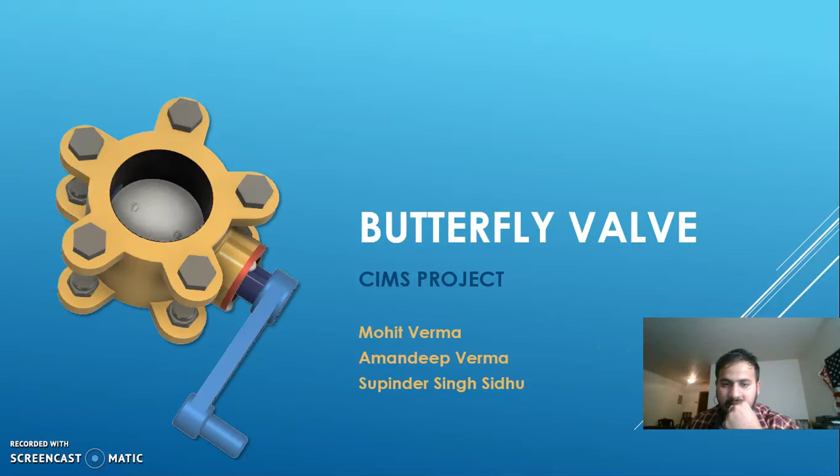Hello friends, I am Mohit Verma and my project is Butterfly Valve. I have three members in my group, Amandeep Verma and Supinder Singh Sidhu with me. So our project is on Butterfly Valve.

So Butterfly Valve is a quarter-turn valve in which we have a revolving disc inside the housing. When the disc is parallel to the flow of the water, it allows the fluid to flow. But when it is perpendicular to the flow of the water, it blocks the flow of the water.

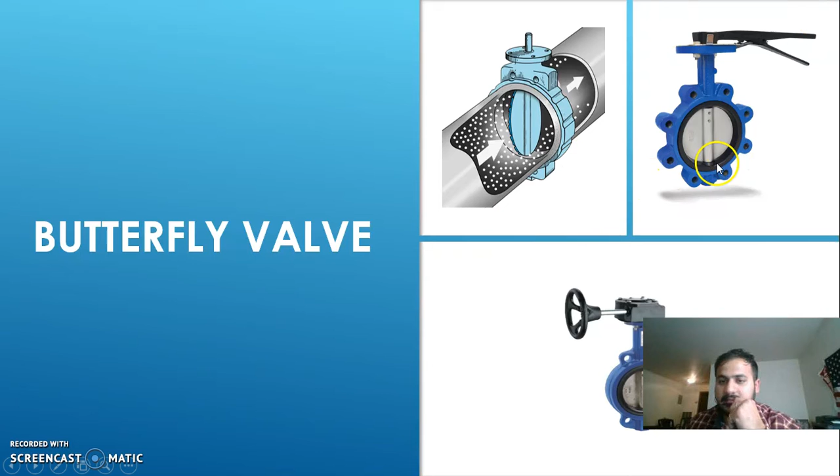So here is our design, which we have designed in Fusion 360. We have a main outer shell, and then we have a valve disc, which is inside the shell, and then we have the shaft, the handle, the rivets, and the nut and the bolts.

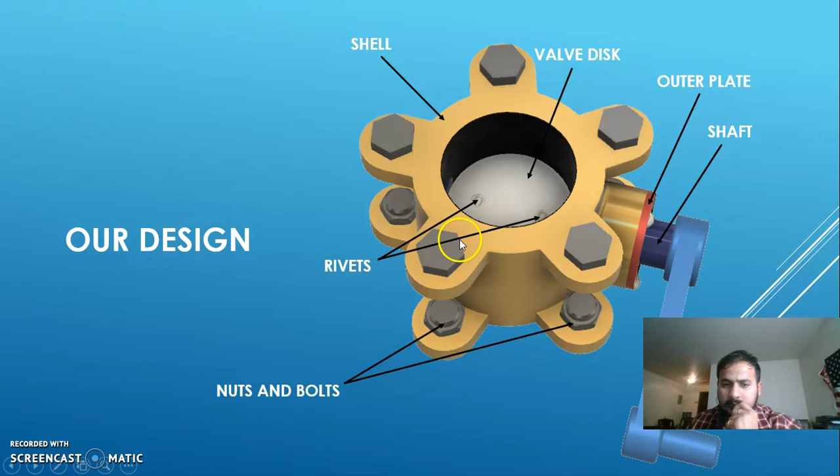So here is an exploded view of our model. The disc goes from the upside and the shaft goes from the right. We have an outer plate which is used to stop the shaft inside the shell.

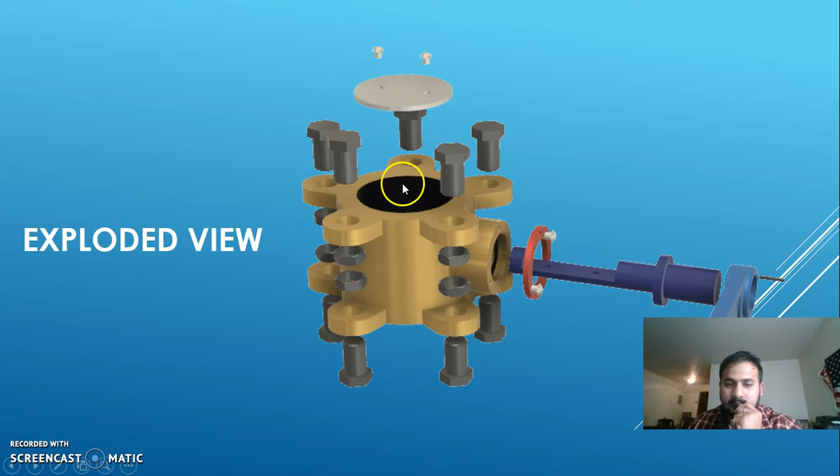We have the nut and the bolts which are used to connect the valve with the pipe assembly, and then we have a handle which we have designed to attach to the shaft using simple keys. We have also designed the gaskets, or we can say seals, so it will not allow leakage.

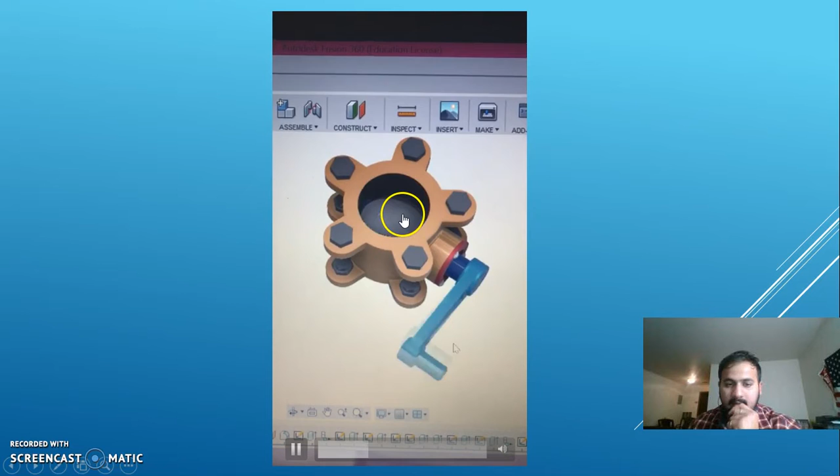So here is a video of how our valve works. So when it is parallel, it allows the flow. When it is perpendicular, it blocks the flow.

So we applied some DFM techniques on our project. Earlier the disc design was like this. It has a hollow hole in the center which has threading inside it, and the shaft also has threading, and it is inserted in this hole.

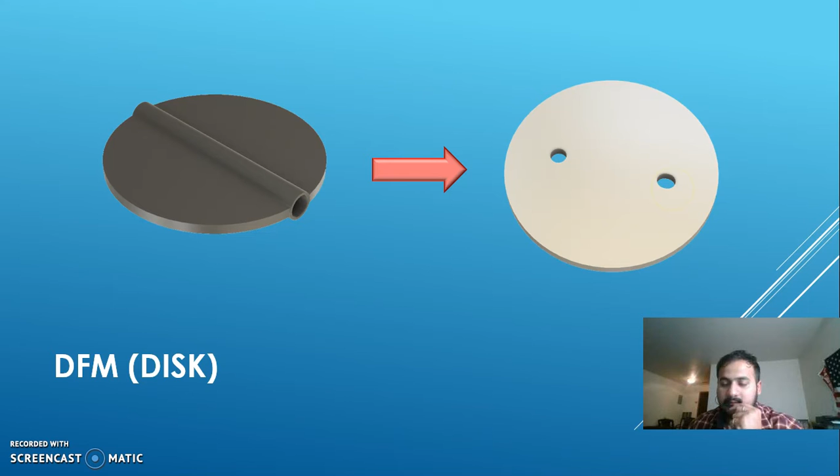But the disc we designed is a circular plate with two holes. The first hole is smaller, you can see, and the second hole is a little bit like a slot and a little bit bigger. We give it a little bit of tolerance so that we can easily align the holes with the shaft holes.

So we applied the DFM technique on the shaft also. Earlier the shaft was like this. It has threading. The threading process is a time consuming process, and it also uses some gears to revolve it. But our shaft is simple. We can machine it using simple turning operations, and this slot can be easily made using a planer.

And we have a key slot over here, so it can be assembled with the handle. We have two holes over here so that the valve disc can be riveted over here.

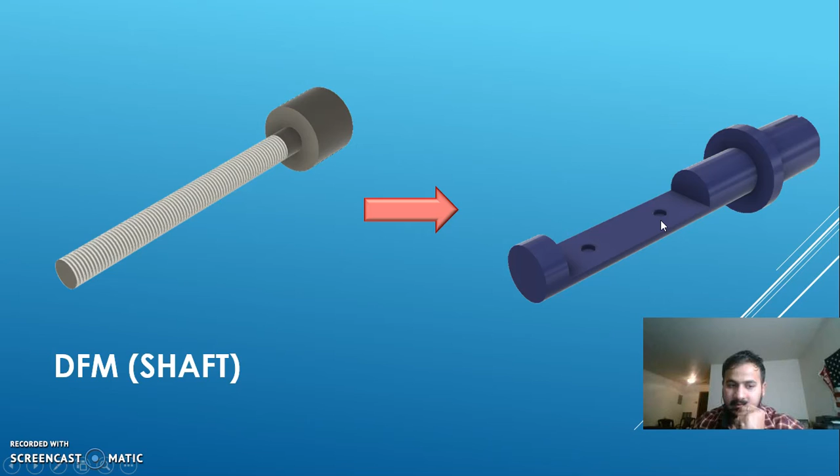So we used the DFA technique in our project also. Earlier the assembly was very time consuming. It had some gears, a thread assembly and the actuator in the handle, so it took a lot of time to assemble a valve.

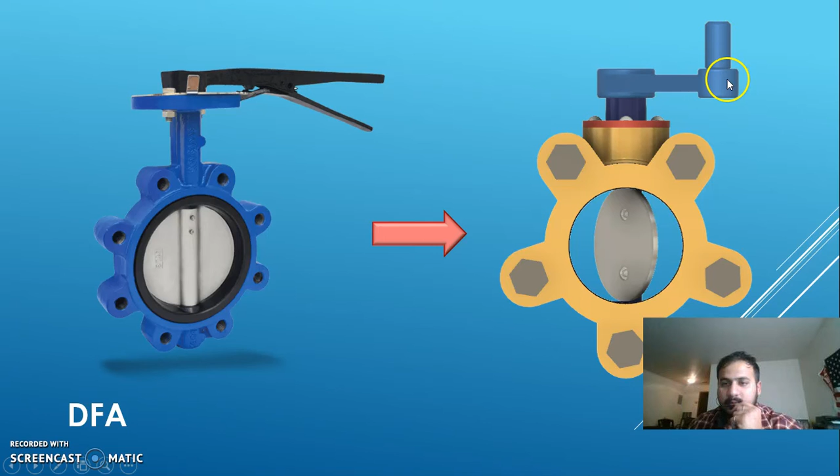But our design is very simple. We have a shaft and a valve which are joined with the rivets, and a handle which is joined with the keys, and it can be easily joined with the pipes.

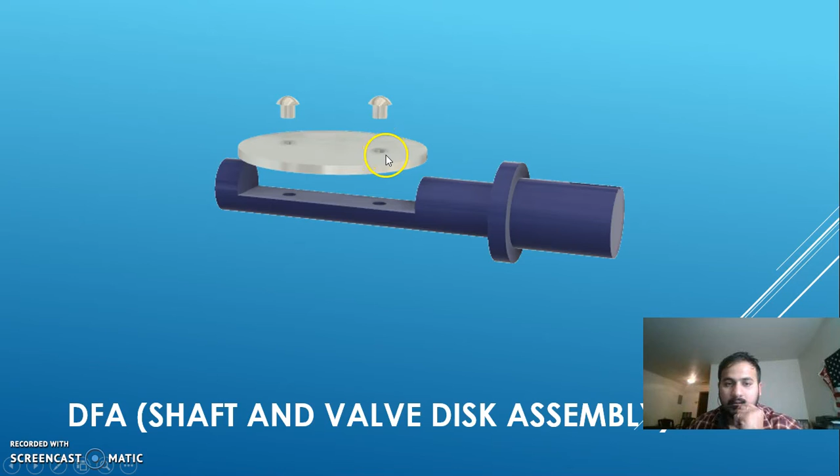So here is what we did with the shaft and the valve. We designed a new shaft and disc valve so that we use rivets instead of threads. Rivets are used to hold the disc with the shaft, so it will be easy and less time consuming. And we have made the second hole a little bit bigger, so it will not take time to align the holes in position.

So second, in DFA we did something with the handle and shaft assembly. We put a little slot in the shaft and a little slot in the handle. So we designed two keys, so it will be easy to join the handle with the shaft.

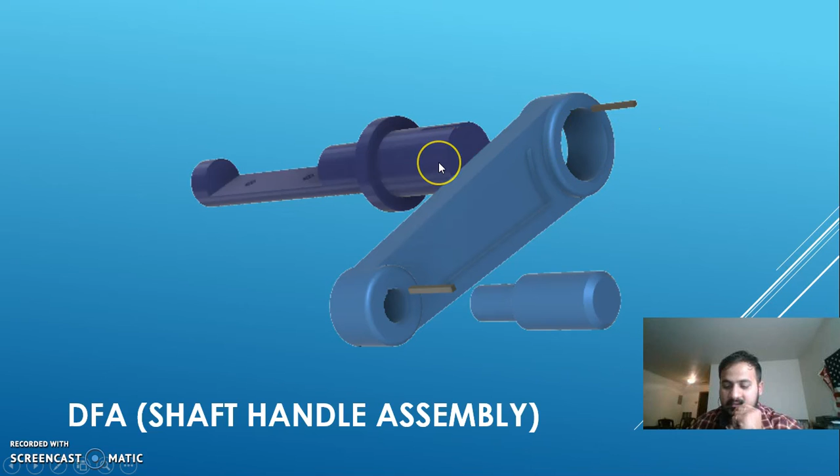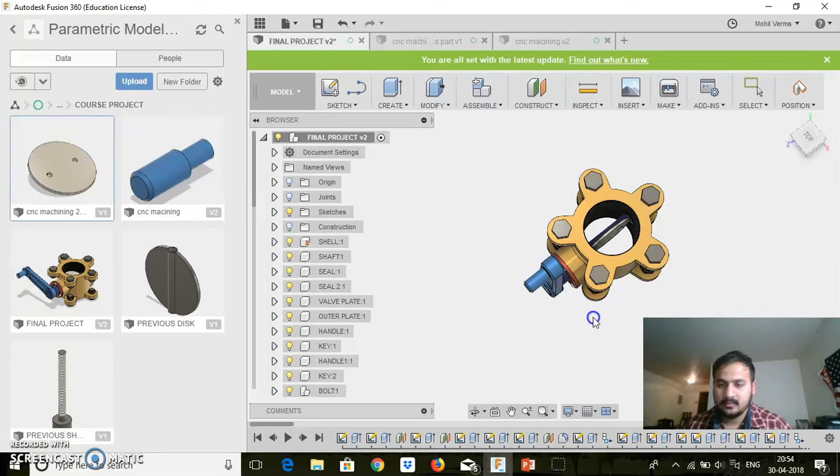So now I will take you to my model. So here is my model. You can see we can rotate this and we can put this in the parallel position and the perpendicular position. This position is parallel to the flow of the water, and this position is perpendicular to the flow of the water. In this position it allows the fluid to pass, and in this position it will block the flow of the water.

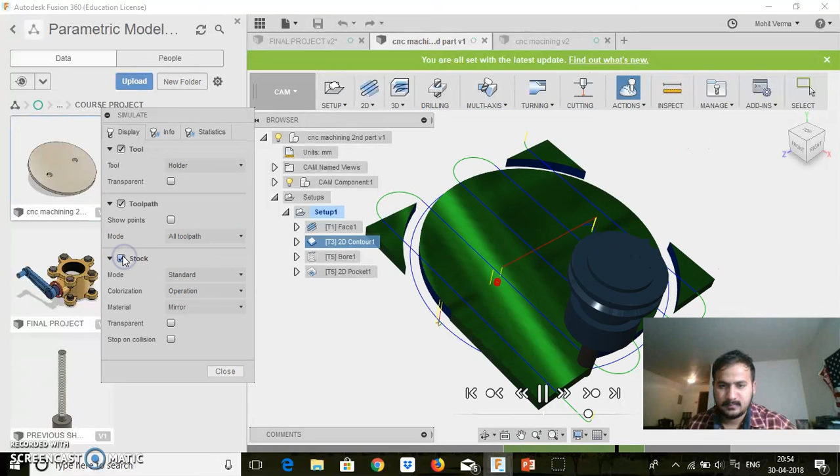So we have done some machining on the parts. So this is the valve disc. So you can see the machining process. And we did the machining process for the shaft part also.

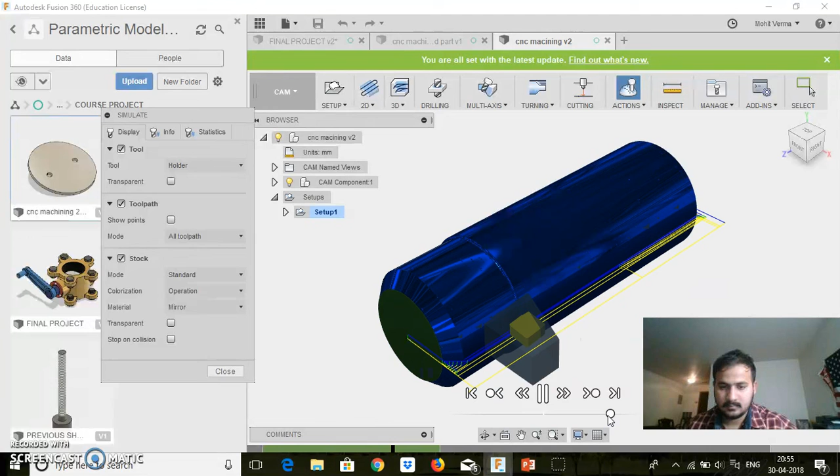So thank you, that was our model.